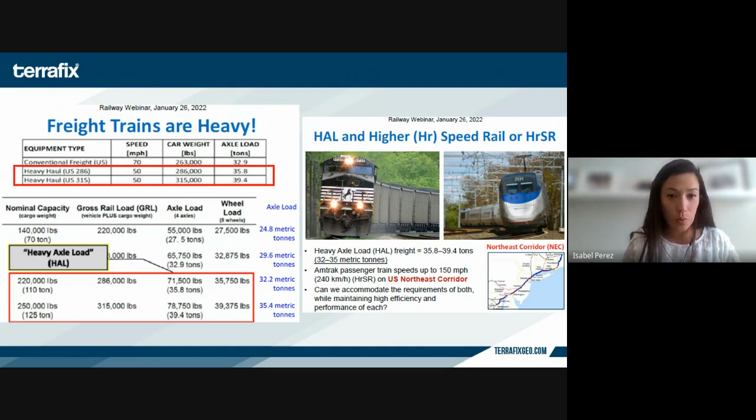As I mentioned before, we combine light and heavy duty shipments on the existing infrastructure, and due to increasing demands, we're also trying to maintain some sort of safety measurements as well as efficient and reliable operations. It's really hard to do.

We receive inquiries often asking how we can build this properly and avoid certain maintenance and rehabilitations, which lead to line interruptions, and how we can do it better. This presentation will include part of what we can consider an action plan.

The demand is really high nowadays, and we need to be sustainable and think outside the box on how we can come up with a measurement or action plan that meets the demand without compromising the performance or the design requirements we have to meet for rail track design.

Freight volumes have been going up, as well as material costs, labor, and environmental restrictions. What must go down, or be addressed, is how we can lower maintenance and incorporate part of the existing materials, because ultimately resources are limited.

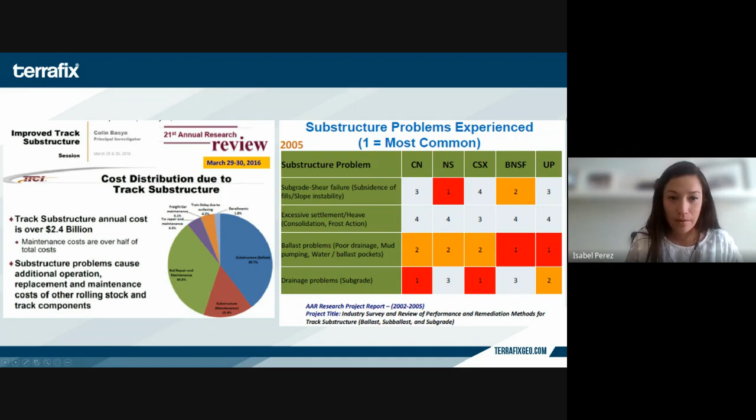Let's go to the next slide and expand on that further. Part of those numbers that you will receive, and actually this is being recorded for the webinar, has been released for transportation infrastructure. Based on that, we also develop parameters or inputs for what type of challenge we need to address in order to avoid those issues.

In the case of how to avoid or elongate certain structures with less maintenance and rehabilitation, we have to do some action plans. One of these action plans is how we can enhance drainage. If water is the #1 issue, how can we enhance the water flow and allow a certain water flow that keeps our track in shape?

When we talk about gradation and drainage, it's about moisture retention — how we can enhance the water flow and keep the aggregate clean, so we can design with confidence. When we talk about inspection, what materials are we going to use, and how can we enhance the strength or performance of those materials, or in the case of track stabilization, restrict or decrease aggregate movement.

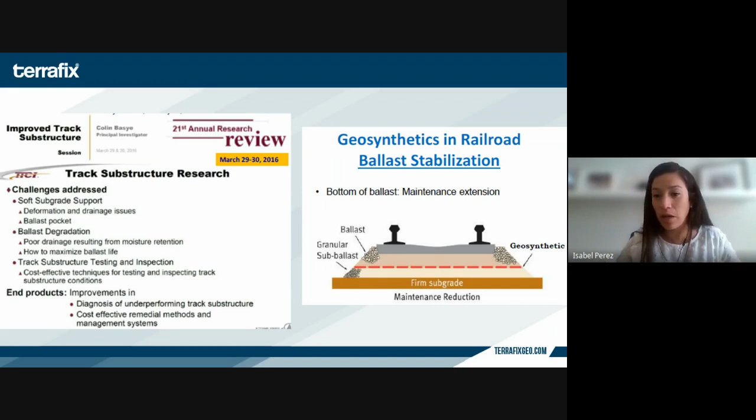But we also have findings that even when you have a firm subgrade, it can enhance the performance of that structure with maintenance reduction. Next slide, I'll show you the two different scenarios.

As we mentioned before, innovation — what we can do differently to meet the demand, and not just meet but exceed it — can save a lot of the money that's invested right now in maintenance, rehabilitation, creating new lines, or building new tracks. Design approaches, materials, and construction techniques can certainly improve rail infrastructure.

Whether it's soft or firm subgrade, part of the foundation, we can certainly reduce the aggregate thickness needed — from a design perspective — on top of that, even the subballast, ballast, and bedding. But with a firm subgrade, okay foundations, we can also offer maintenance reduction solutions.

By restricting aggregate movement and enhancing water flow due to confinement, we can certainly say we'll be able to elongate or achieve a higher design life with a reinforcement system rather than not having any reinforcement system in place. Let me give you a quick sample of what I'm saying, so it's visual for you guys.

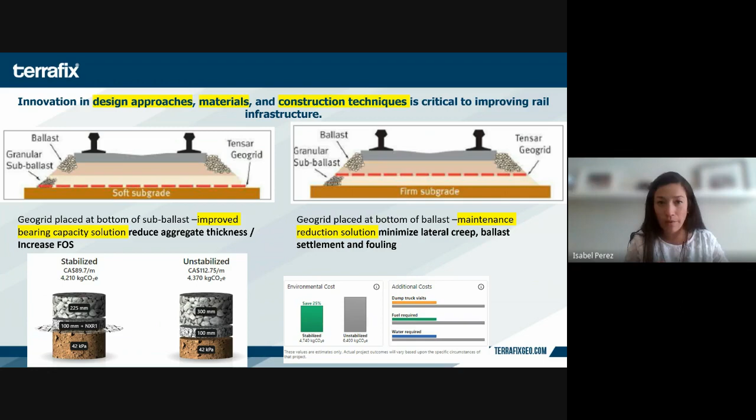Most of the time when we talk about ballast construction, equipment damages a lot of subgrade conditions, because most of the time the subgrade will be exposed. So there are some things that we can do in that way. Andre, if you want to go next.

When we talk about subballast and ballast function, both of them are aimed to prevent issues and enhance track stability. When we talk about ballast, it's mostly to provide stiffness on the structure, and due to that, let's say provide drainage. In some cases this is kind of a question mark, or how we can enhance that. But also the function of the subballast is to provide frost protection, as well as create that separation within the ballast and the subgrade.

So at some point there are other question marks. If those two elements, or two cross sections, are built with that function, why are they failing? If the subballast's main function is frost protection and to act as a separation between the ballast and the subgrade, why do we still have subgrade pumping on the surface of the tracks? So again, it's not just building it properly, but how we can enhance the safety factor that those sections are all built properly.

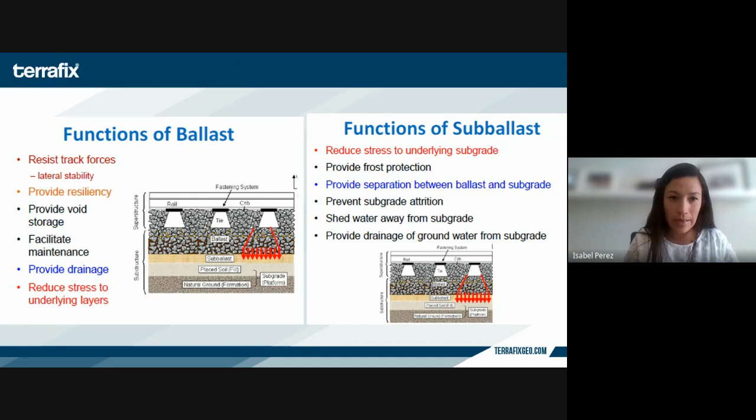On the next slide, I will show you how Geogrids in this case can certainly enhance that confinement and interlocking effect that we need to keep the aggregate in place. By doing that, we will enhance the water flow. We will also add, or include, another material or component, and enhance that separation that needs to occur between the subgrade and the ballast, to keep the material clean, to enhance the water flow, and certainly to enhance the stiffness of the material.

So taking into consideration as a system, the geogrid and the aggregate will work together, as you see here on the top side of the pictures, to influence that confinement and interlocking effect through the section, where we can restrict or minimize, at some point. Let's say avoid can be an aggressive term, but we can certainly say that we are able to restrict and minimize aggregate movement. And that makes a lot of sense when we talk about rails, due to the vibration and the conditions it is naturally exposed to.

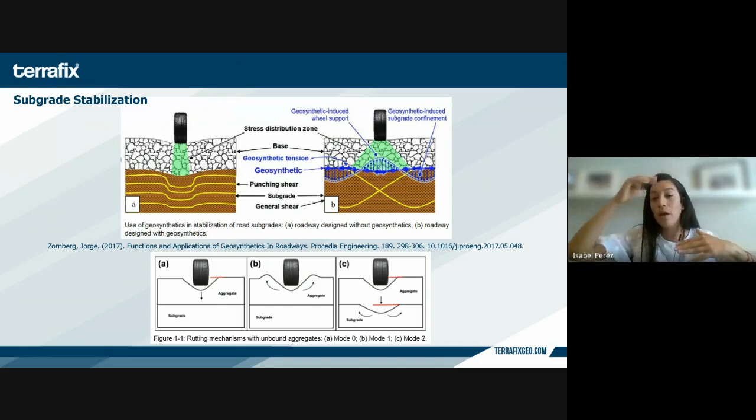When you don't have an enhanced separation layer or any reinforcement in place, you will see how the load is distributed in an area. What's happening now is when the subgrade is not competent to address those loads, at some point the subgrade will rut and the aggregate will find a way to accommodate, and at some point you will have ruttings, and that type of failure will be visible on the surface.

So the main goal of the geosynthetics is not just to add that tension membrane where it can hold the weight of the material, but it's mostly to create a flexible system where the load can accommodate and have a better load distribution, and the system itself will be connected, able to address the load and work together with bad soils or less compromised areas with more compromised areas. It will kind of build a uniform section.

At some point, this is what the system aims to do, is try to avoid any possible failure. And when I'm saying that, we as consultants, designers, or part of the industry, there are some things that we can control and some things that we are not able to control.

The things we can control include what foundations will go into a site. When the project is given and you have the borehole information or the geotechnical report, you have to start with a foundation number. Something we cannot control because it's given is the current conditions. Sometimes we have to deal with very problematic sites - a lot of drainage and filtration issues, different types of materials, contaminated soils, environmental restrictions that limit the consultant or designer from removing and replacing, or utilities that you cannot go under to properly build a desired cross section.

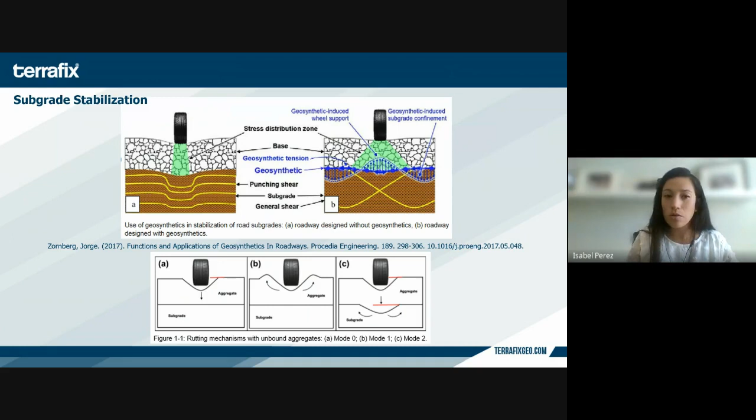In this specific case, geosynthetics can help a lot with avoiding or addressing those issues and building with confidence. So when we talk about rails, and about the layer or section of influence...

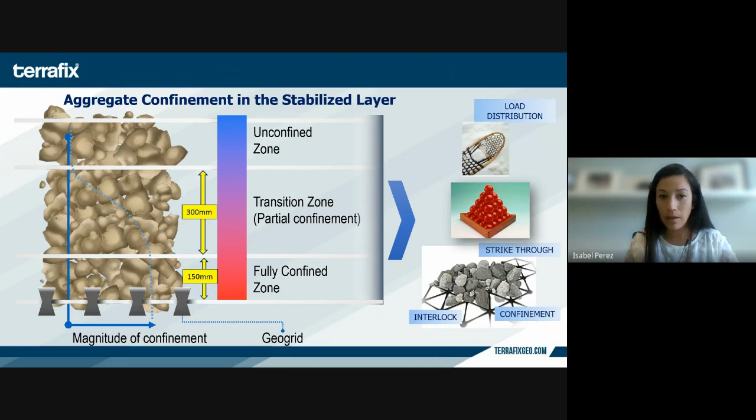So we'll say that as a general guideline recommendation. If you want to go next, I will expand that further.

When we talk about the importance of track substructure, something we already discussed about the failures is how we can make it better. In this case, the ballast will address most of the load, but the subballast can also enhance the performance of the ballast, and we can separate and avoid stresses within the subgrade and prevent that failure. Building a better subballast, bridging and building the subgrade, or allowing less stress within the subgrade can make a lot of sense when we talk about dissipating or reducing that failure portion that we may have with track designs.

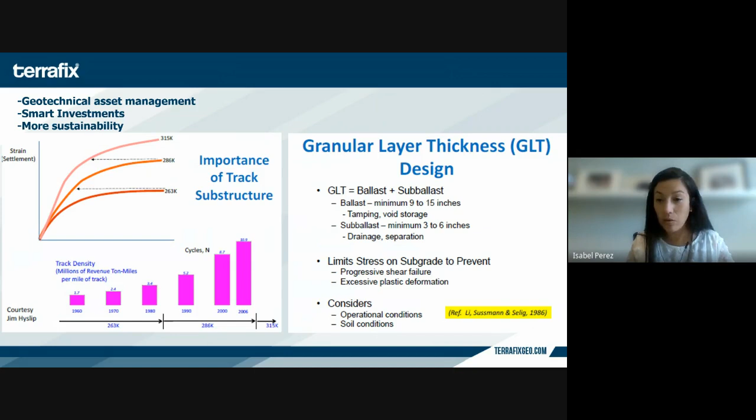So again, building a better substructure makes a lot of sense with the terminology called geotechnical asset management - how you can make smart investments and be more sustainable. If the foundation is not able to address that load, even design load, and if you have a higher volume of traffic and even more weight at some point, that also works against the design. So if we build better substructures, maintenance or rehabilitation should be done in the upper section rather than the lower section, which means less interruption, less budget, and it all ties into geotechnical asset management - how we can protect our current foundation.

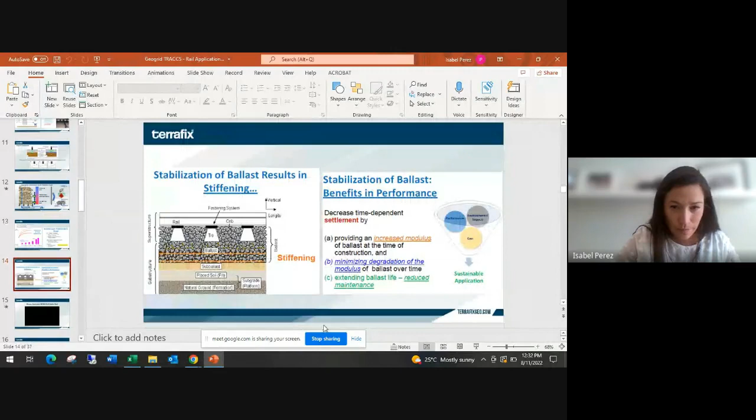So again, the idea is how to consider, as a consultant, an overall attention on the substructure and how we can build it better. Geogrids can provide a lot of benefits when we say stiffening, confining, and at some point that separation that sometimes isn't happening even with the subballast in place.

So by doing that, we can increase or add that enhancement factor, not just on the subballast, but also on the ballast. We'll talk about the enhancement factor in a few minutes, and how it can also minimize the degradation of the modulus of the ballast over time.

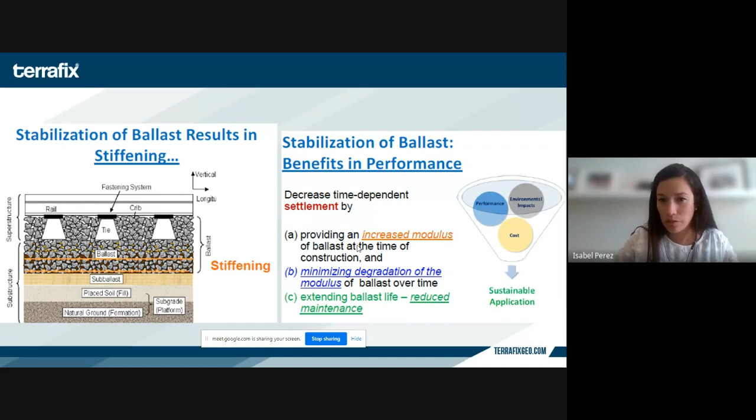This is also related to how the rails work and how vibration can impact aggregate movement, aggregate rotation, and at some point fragmentation, which all lead into extending the ballast life, which also reduces maintenance and rehabilitations.

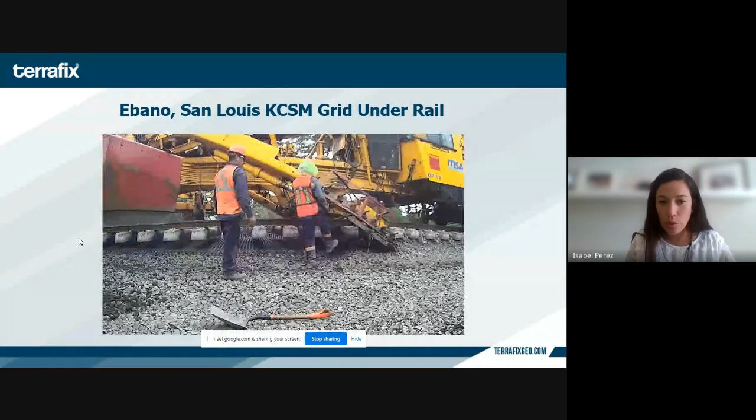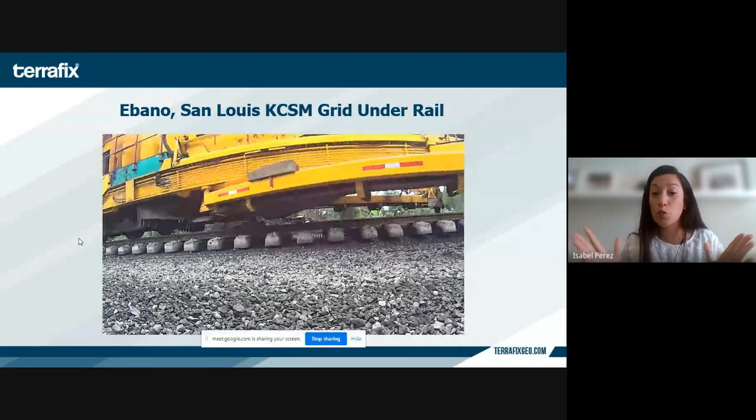This is a video installation that I want to show you, on how even at some point geogrid was not part of the design, how you can do some maintenance and incorporate geogrids, in this case between your subballast and ballast. By locking that material, or restricting that aggregate movement, and enhancing the performance of your ballast, it can make a lot of sense when we talk about less maintenance, less rehabilitation, and better track stability or track design.

So this is just an example from a construction point of view, and it will be a little bit more visual for you to understand how it can be done and how quickly it can be done. Again, it makes a lot of sense when it helps decrease maintenance or major rehabilitation cycles, as well as keep that aggregate in place.

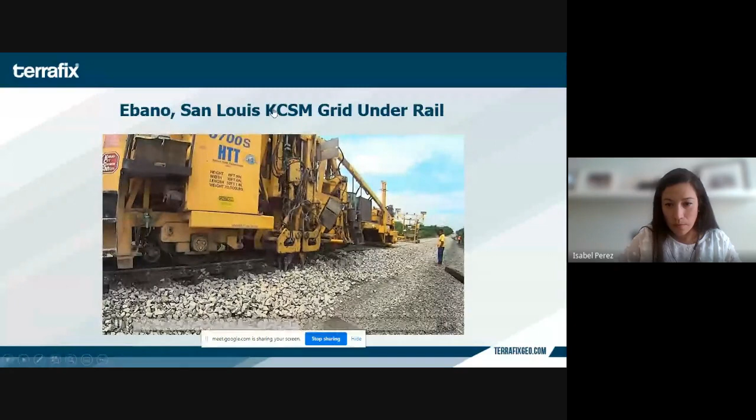Smart rocks are fake aggregate that have a 360-degree sensor, and basically what you're going to see in the next couple of slides is how the smart rocks, or how the aggregate, interacts with the reinforcement system by enhancing its performance -- restricting aggregate movement, reducing aggregate rotation and therefore fragmentation, and how all those components together lead to a better overall performance.

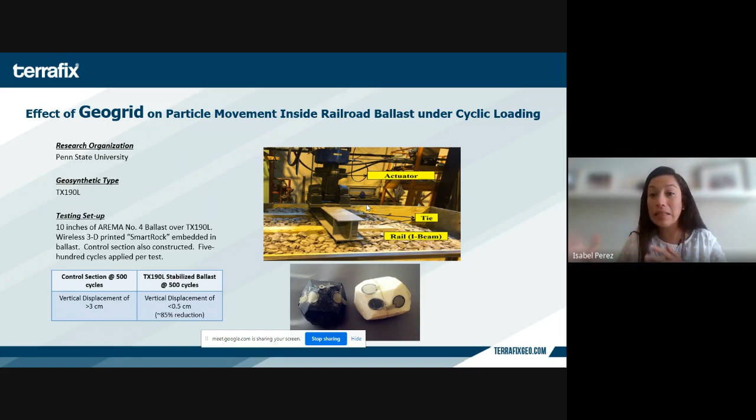So again, this is the fully instrumented rail, and you will see how the rail is moving, which mimics or simulates real rail movement. If you pay a little attention, when it says non-stabilized it means no geogrid, and at the edge we'll see in real life how the rock or the aggregates are moving.

And on the other hand, on the right, stabilized with TX190L, which has the largest aperture geogrid aimed for ballast-size material. You will also see the edge and how the rock is reacting, or moving, due to the track vibration.

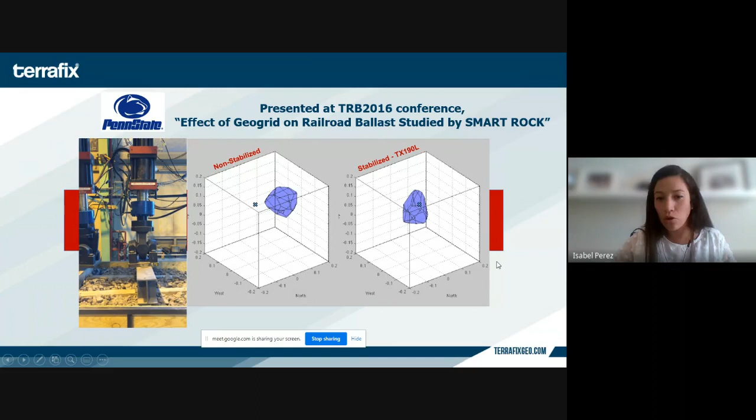Okay, so at some point, in the non-stabilized section you will see the rocks or aggregate go out of the edge. Let me see if I can replicate that -- you will see that at some points it goes in and out. Later on you'll see what that means: when the edge goes in and out, it means there is no control section, and the aggregate is basically free to move.

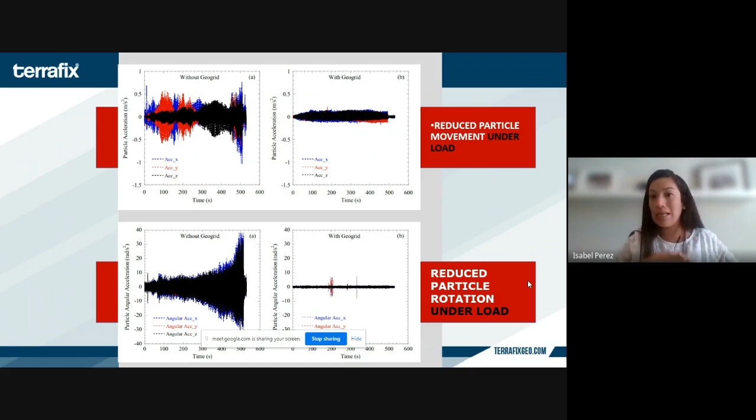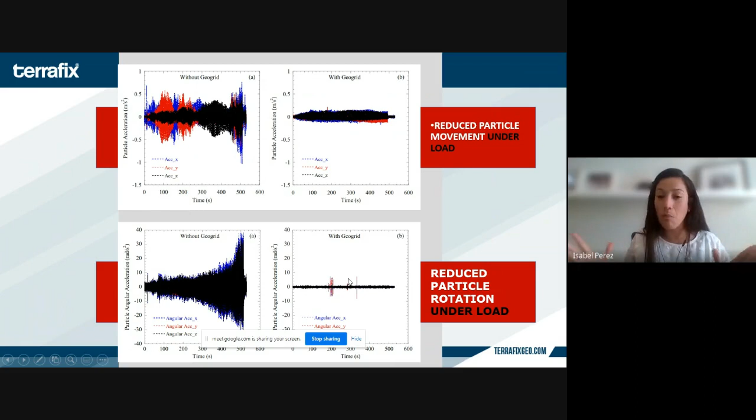You will see here on the upper section how we are able to reduce or control particle movements under load when we talk about geogrids or non-geogrids. And same was when we say reduce particle rotation, that can also lead to aggregate or particle fragmentation, and that will cause a lot of issues when we talk about rail designs or rail performance.

So you will see how you can have a more controlled section with geogrids rather than without geogrids. So we have, to be able to have designing tools, something I will show you later on, is how we are able to back up ourselves, or quantify and measure the benefit of geogrids when we talk about rails.

So again, most of the studies which you may have access to, not just are you able to decrease a certain percentage of the aggregate thickness, but at some point you can even incorporate part of the existing soils without decreasing the thickness. You will have less excavation or disposal costs, which can be very expensive, but also you can elongate or maximize design life and extend maintenance or rehabilitation cycles.

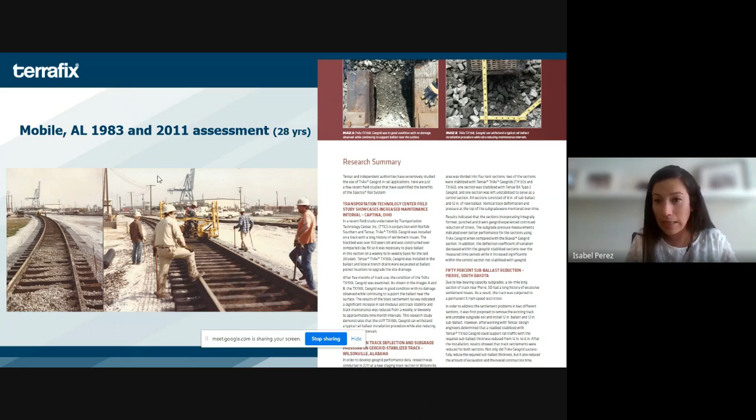And in 2011, after 28 years, a sample has been taken on the site and evaluated, showing how it is still performing even after 28 years. So something we can prove as not just in situ lab tests for long-term design performance, but also in real action, how it is still performing.

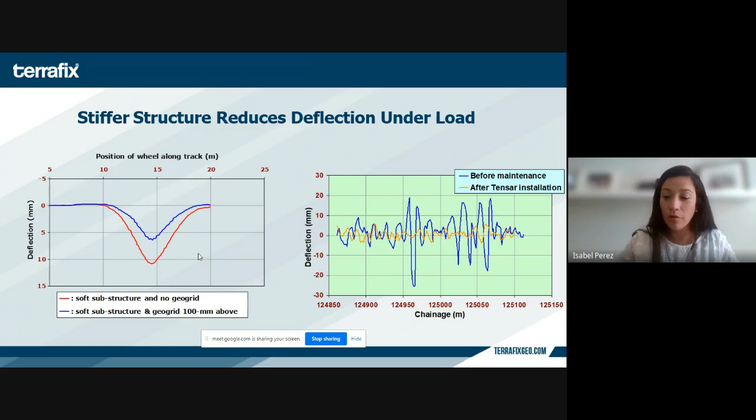Again, stiffening the structure and reducing deflections under loads, and after those tests, and also from the academia - which was my guest speaker introduction, he spent over 40 years or more on research on different types of geosynthetics - there is no doubt or question that geogrids can certainly enhance substructure performance, and actually enhance, as I mentioned, by creating that system, the layer coefficient or the strength of the materials when it works in a system perspective.

We also don't want to just focus ourselves on the example which may have more longevity, but we also want to name some of the local projects that we've done with geogrids. In this specific case, geogrids also have a backup of the AREMA formula, so we will be able to provide a design that meets with the provincial and federal standards within the sector.

And part of the designing tools that we have is that those tools are kind of flexible based on your priorities, based on your site conditions, and overall based on the project perspective. So we can work on some assumptions, or when it's designed, I give you options and which one of them makes sense.

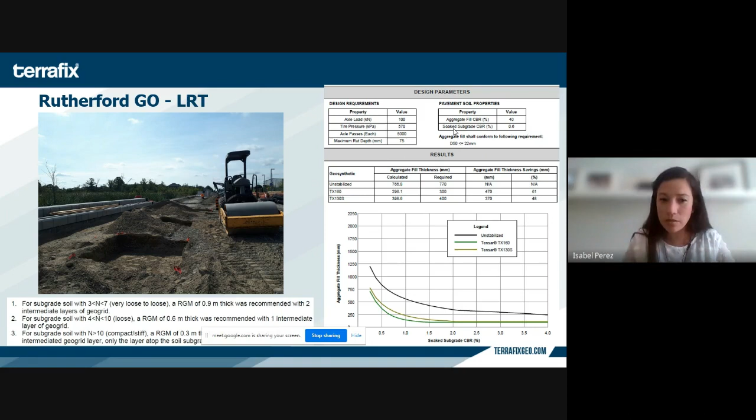So in this specific Rutherford LRT, which was completed by the beginning of the year and right now is in total operation, it's a public project. The geotechnical engineer provided 3 types of scenarios, because due to the site conditions they have different types of materials. In some sections, the subgrade was below 1%, a very problematic section with very low bearing capacity on the ground. You have some medium values, which fall between soft and stiff conditions, and we have stiff conditions with a CBR value above 3%, in which case the geotechnical engineer did not incorporate or include the geogrid.

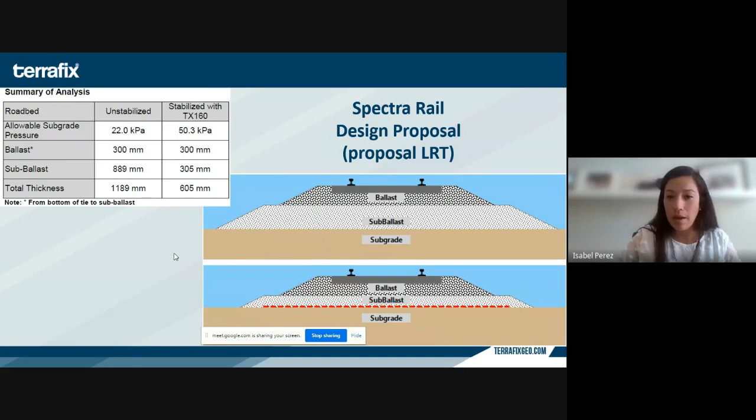Okay, so overall, we were able to save at least half of the thickness in the more aggressive scenario, and having a layer out in place.

Again, for more details on the design, feel free to reach out to me.

We also have another case study on rail applications, mostly for subgrade improvement on their rail track. This specific case is in Lakeshore Corridor. The main issue was they were building a second line for the rail, with an existing surface right beside it. They have some subgrade issues, and due to site challenges and utilities, they were not able to have the full thickness of the cross section to build.

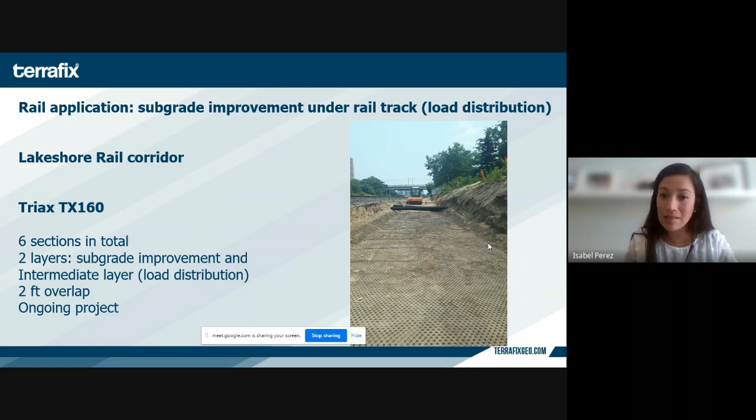So in this case, we really wanted to enhance and maximize the benefit of the Geogrid, and it was recommended to incorporate 2 layers totaling almost 600 mm, or above 2 feet, to have full confinement and maximize the benefit of that system at all times.

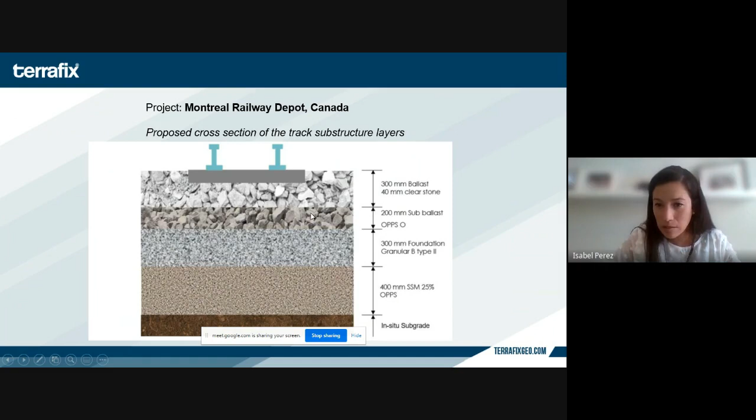We also have other types of situations, and I want to explain how we can go from traditional up to the optimal, and what results you may get between the two. So again, as we discussed, we have ballast, subballast, in this case foundation, and you have some fill and some in situ subgrade.

We can share more tools, not just designing tools but also in situ tools that you can use. When we talk about 1% CBR, we say that we're between soft and medium. There are also guidelines for when you just have a visual inspection without a geotechnical report ready, or when you have DCP or borehole information so you can correlate. Ultimately, CBR is just a unit, so you can correlate certain numbers with certain visual inspections.

So we can say that we're not just able to reduce the thickness of the material, but able to go from a very low number, CBR 1 between soft and medium, and bring that structure with certain thickness to CBR 25% between the fill and the subballast. The subballast will take a lot of the weight, but we can enhance that cross section with Geogrid, which would otherwise take a lot more aggregate thickness to build. So we're able to build it in a more cost-effective way.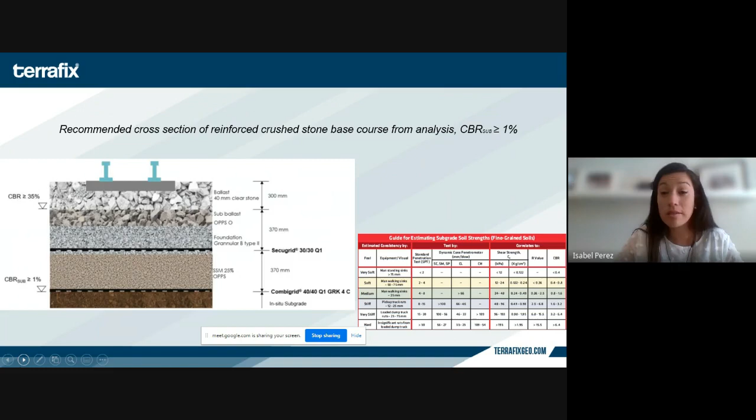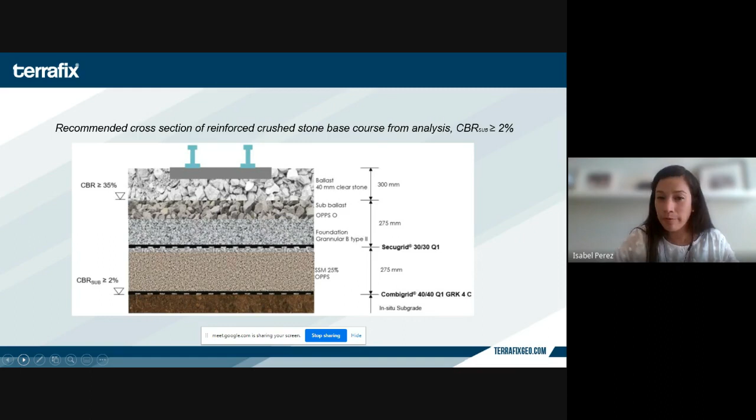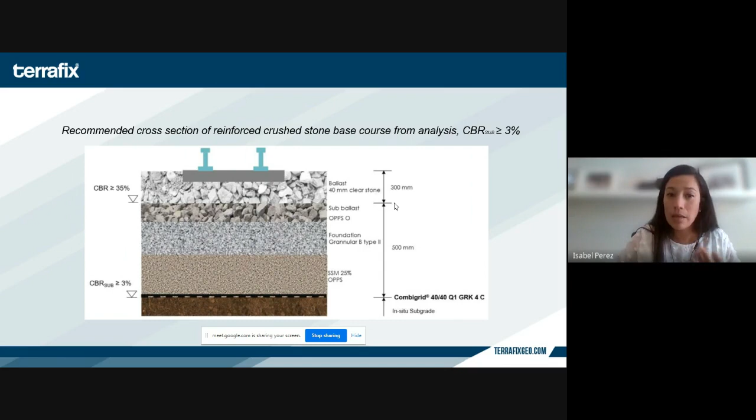Same as with 2%, that was the case of Rutherford LRT with different scenarios - how we can still achieve that approach even with less thickness of material, and how you may get better shape or better numbers onto the subgrade, reducing the amount of fill, subballast and ballast while boosting performance rather than compromising it.

Talking about rails, we also not just design but assist with a lot of intermodal facilities. CP and CN are among the main users of that service. So if you have any inquiry or projects coming up, one advantage we can provide to your structure is reducing the removal of unsuitable subgrade soils.

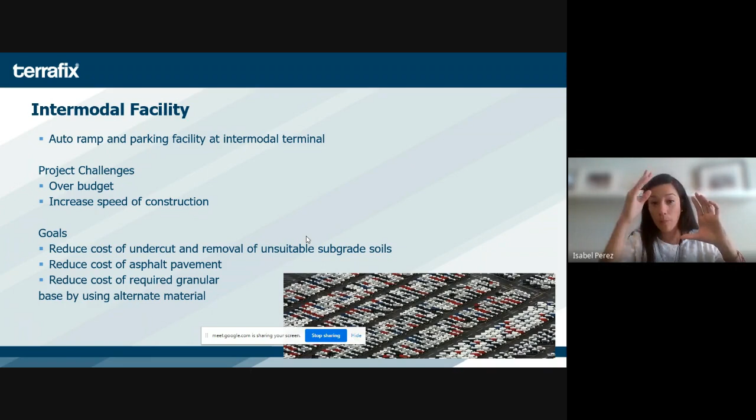At the end of the day, whether building or rebuilding, we do a lot of rehabilitations and designs, and it's about how you can maximize the benefits on the upper section rather than going into the subgrade. For rehabilitation and for new builds, we can enhance that separation layer, creating a system that reinforces and confines the fill if required, across the overall pavement structure - reducing the cost of asphalt pavement and material, or enhancing the safety factor on both.

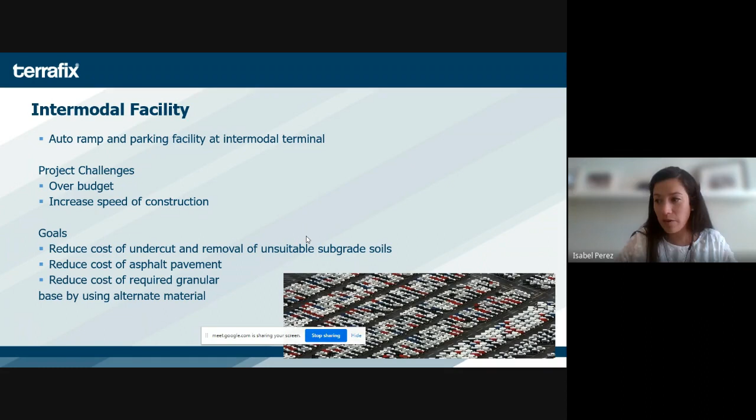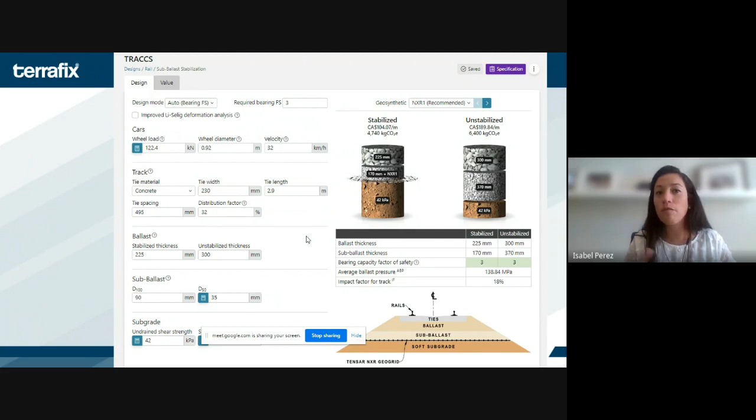For the purpose of this presentation, as I mentioned, I do have a demo if someone wants to interact and see how we can approach a possible design with Geogrids. Overall, we're able to reduce not just the cost of the work, but also the time, fuel, water, and many other environmental factors that may be considered in your project.

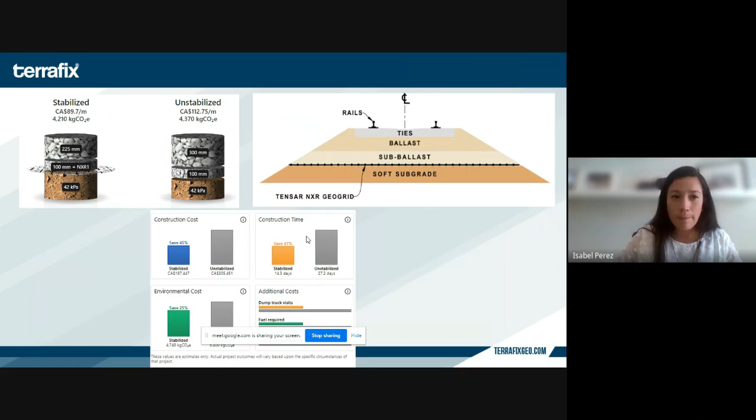At some point, being able to address site conditions makes a lot of sense to build it better - not just thinner and cheaper, but better. This is part of our proposal or something you can get out of that.

We also have Geogrids on rail applications overall, not just for soft soils which is the most well-known case for Geogrid, but in other types of applications as well.

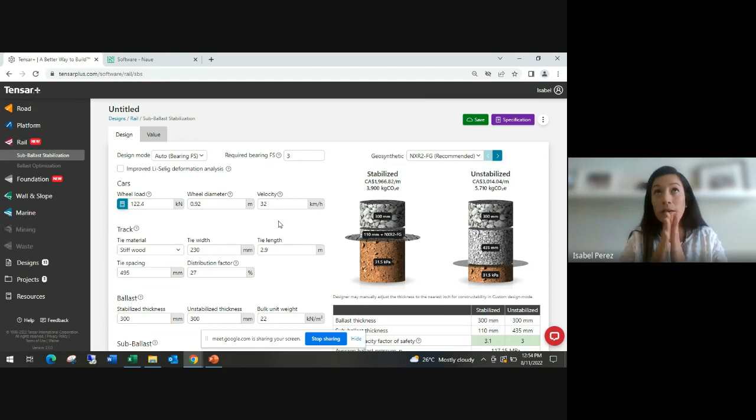So when we say, okay, it's not about how much it will cost you to build, it's about what will be my safety factor, or if I build better than anticipated or better than design, how much I can have it, or for how long. So let's just give you one example, and if you also want to have another question after that, let me just give you something that we can say. Let's keep that ballast thickness at 300 mil and subballast, let's say, the D100 is 90.

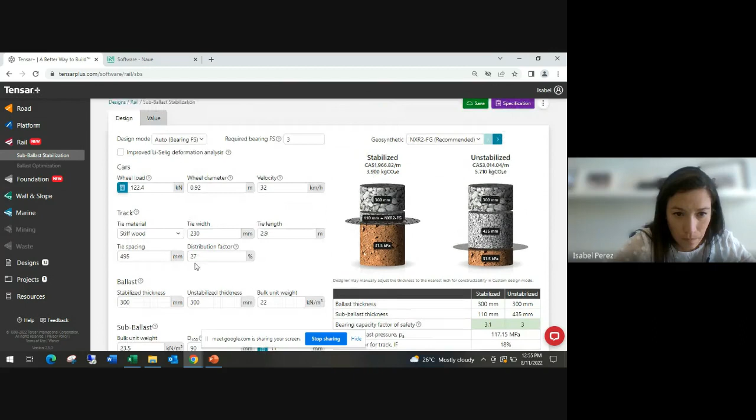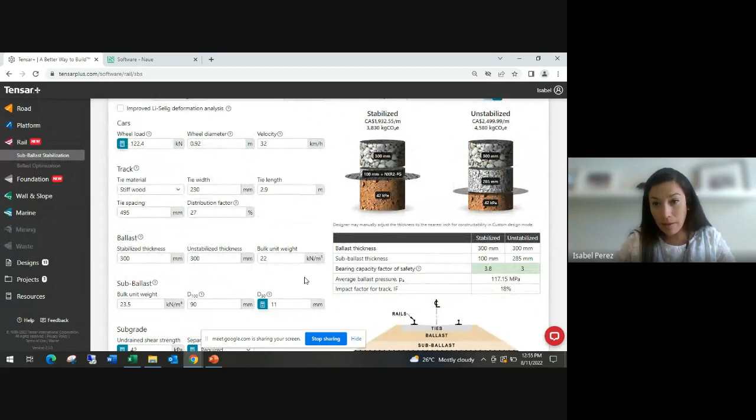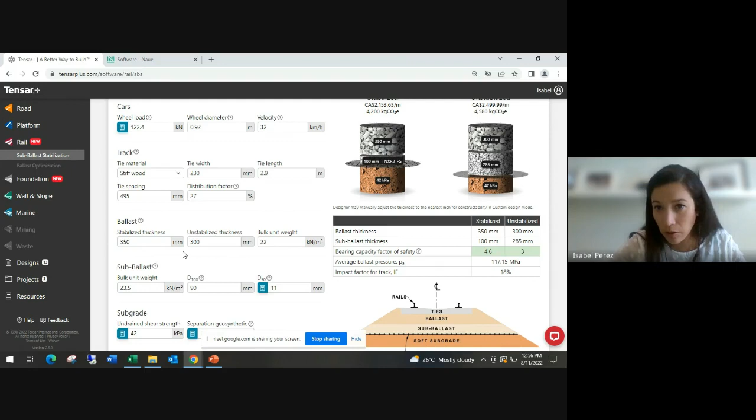Let's take the example of the 42 kPa. At some point, if we decide, because we have the ability to choose our subballast and ballast, the size of the material, the strength of the material, or a mixed material with recycled or reused content, we can allocate the right factor for that. We can build that even with a thicker layer, which will cost a bit more than the original, but we can say the safety factor has been bumped from the unstabilized to the stabilized.

We can quantify how much benefit you will have, and you have some inputs here. Ultimately, how many years it will count will depend on the increasing traffic factor over the years. Sometimes we come across an increase in traffic over 7%, over 10%, over 15%, and that parameter will also lead to an increase in performance.

Overall, we can quantify the bearing capacity factor or the safety factor, going up anywhere from 2 to 5%. We can allocate those values and, based on your increase in traffic, say that will lead you to five years more, or at least give you a 50-year design life with a lower maintenance or rehabilitation cycle, which leads to a better built structure.

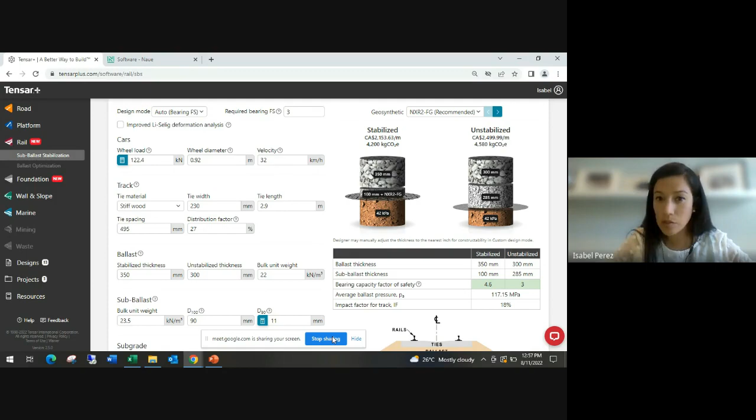Thank you for that response. I have another question, if— Sure. A bit different.

Has your product been used in transition zones, specifically for transitioning from a lower modulus to a higher modulus, gradually, to reduce the rail deflections in the change?

Yes, and to expand on your question, we have been suggesting transition zones. What we have to be careful about, understanding the capabilities of the system, is that it's not aimed to work as a patch. You will have, at every single site, different types of soils, and that information is given by the borehole or geotechnical report. It's very hard to find a uniform section—you'll always have a low value, medium value, high value. For design purposes, most of the time you take the lowest value available.

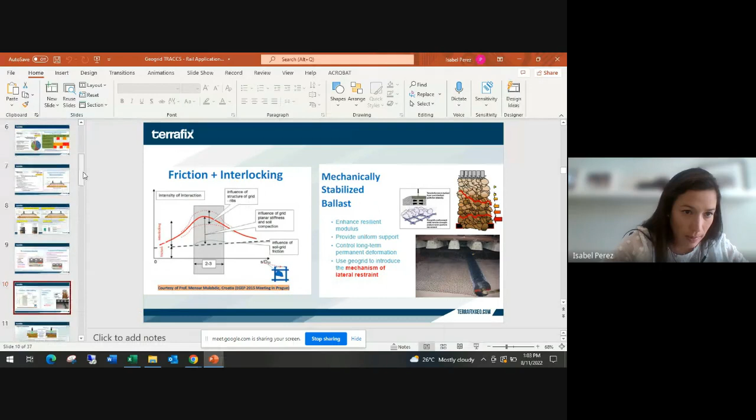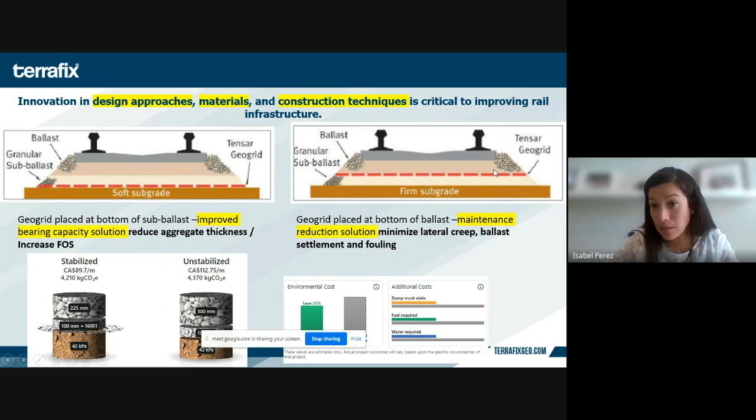Bear with me just quickly. So even though when you have a firm soil - not this slide, my apologies - when we say that we have a firm subgrade, that's why the layer of geogrid is not recommended to be just on top of that subgrade, because we already have a very firm surface for that subballast. So then the intention will be either to place a layer of geogrid between the subballast and ballast, or within the ballast section itself. And again, that layer of influence, or confinement zone, will be on top and under.

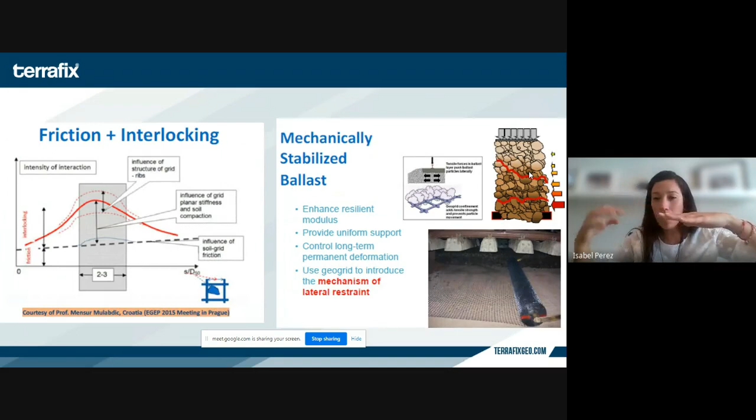And how much would you say this would - I don't know if we have numbers - but how much can it improve the life cycle of the ballast stones and the reduction of degradation over time?

Yes, so that specific question, we have to address with some numbers, because it's not the same design consideration. Let's say if we talk about a heavy duty section versus heavy duty and medium duty, that will lead to a lot of different design parameters, but it can certainly enhance the ballast and sub-ballast performance within the influence section. As per manufacturer, the minimum recommendation is the geogrid needs to have 6 inches or 150 mil on top to have the maximum performance. So even within the ballast, if it's at least 150 mil or 6 inches away from the tracks, you will have the maximum performance, which meets exactly with the fully confined zone.

So the layer of influence or the fully confined zone will be at max. Again, to say that your ballast will last or enhance performance by 30% or 40%, we would need to allocate some numbers, which I'm also welcome and willing to demo. If you have some input values, we can plug them in and see the performance. But overall, we can say that by restricting aggregate movement, rotation, and fragmentation, which was part of the results of the Penn State University study, the layer itself will outperform and result in better conditions.